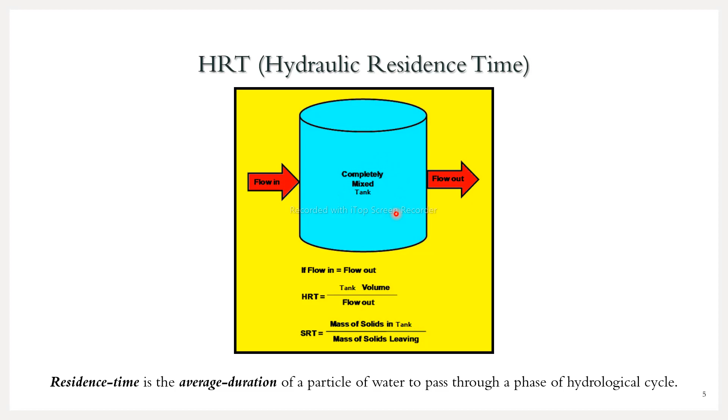So I am just briefing a bit on what was discussed at the last portion of my second weekly interactive session. First I discussed economic water scarcity. Then a brief concept about hydraulic residence time was discussed, which is nothing but the average duration of a particle of water to pass through a phase of the hydrological cycle.

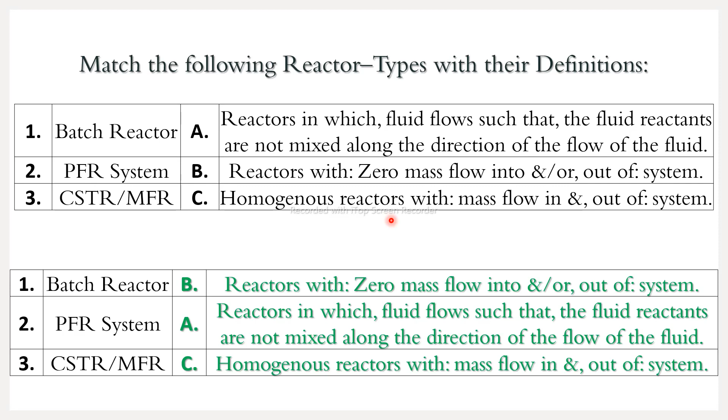One problem was solved for better understanding of the concept of HRT. Then we saw the definitions of batch reactor, plug flow reactor, and CSTR or mixed flow reactor. Then we saw the design equations or performance equations of various types of reactors: batch, continuous stirred tank or MFR, and plug flow reactor.

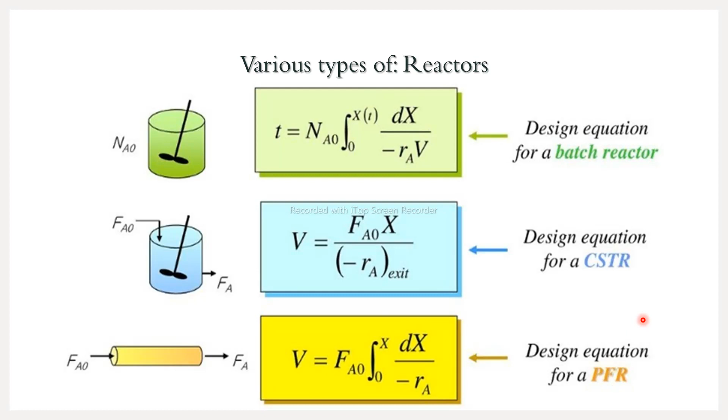Then we derived the equation for first order kinetics in the case of a batch flow system. So if you do the similar mass balance for other order systems, and in case of other continuous flow reactors like PFR, CSTR or MFR, then the T or time term will be replaced with the T0 or theta term, which is nothing but the space time expressed as reactor volume divided by volumetric flow rate.

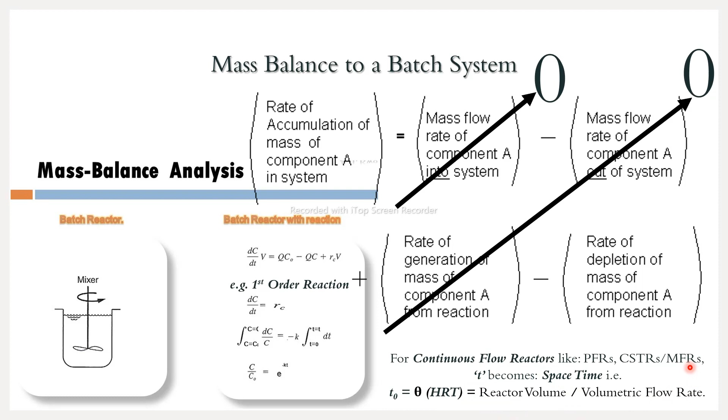And this type of equation we will obtain. Then we focused on the first order kinetics only, and based on the first order kinetics for all three types of reactor, batch, PFR and MFR, we solved one problem at our last class.

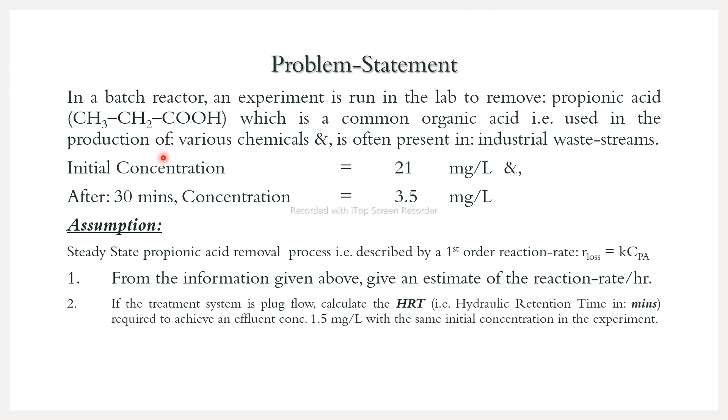So I hope the way the problem was solved is clear to everyone. If you have any questions regarding how the problem was solved, you can re-ask. We just did the mass balance and derived these equations, and these same equations were used to solve the problems to get the answers. You just have to put the known values into the equations in the problem, and then you will get the unknown parameter from the equation.

Okay, so I'm just quickly going through what was discussed at our last session. If anyone has any doubt regarding understanding of the same, then they can ask.

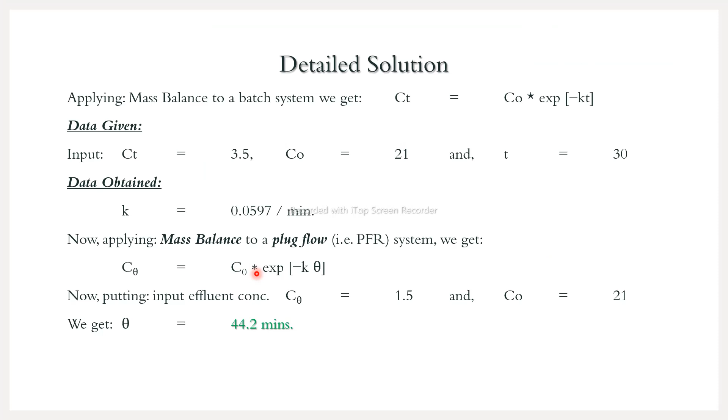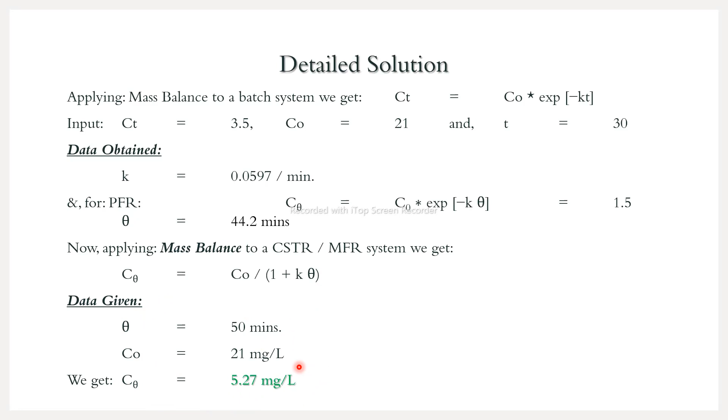So this was the last thing, the third problem, which was asked regarding MFR. You just had to utilize the mass balance equation applicable for the CSTR or MFR system, and based on the given data in the question, you got the answer. So this was the problem which was solved in our last session.

I will ask everyone present in the audience if you have any doubt regarding the solution and how to solve this kind of mass balance problems for different types of reactors for different order systems. If you still have any doubt, you can ask now. This is the correct time for you to ask. I can clarify the same for you, otherwise I'll be going through our today's new problems. Nobody has any question, I guess. I will wait for a minute.

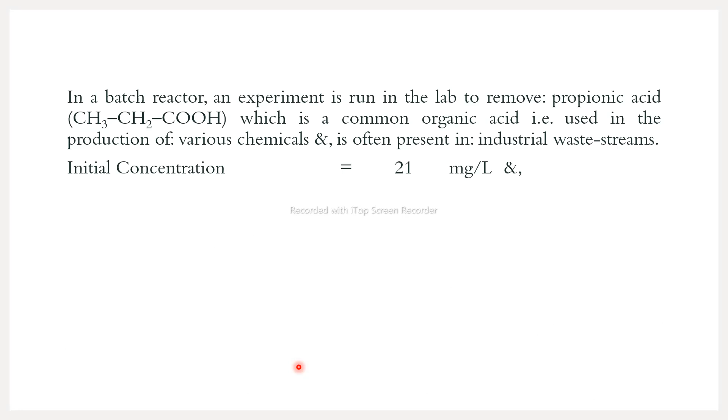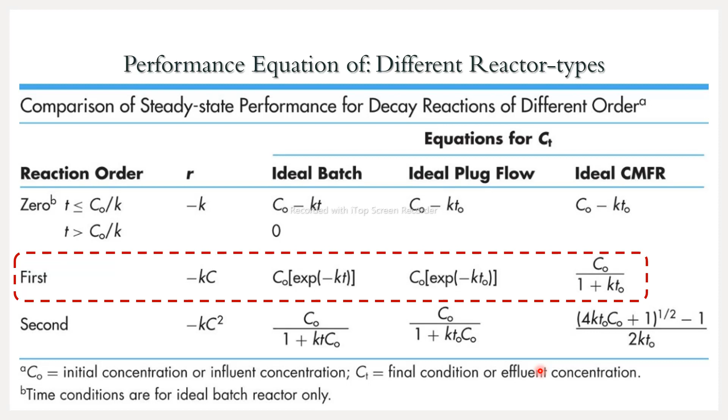This table comes to your aid. These formulas you have to remember. We solve problems based on first order kinetics only; higher order terms you don't have to remember. So zero, first and second order is enough, more than enough I would say. If you don't know integration, just memorize this table for solving the problem. Mainly you will be given problems from zero and first order only, second order is also rare. If you just memorize this table, this type of problem will be easy for you to solve.

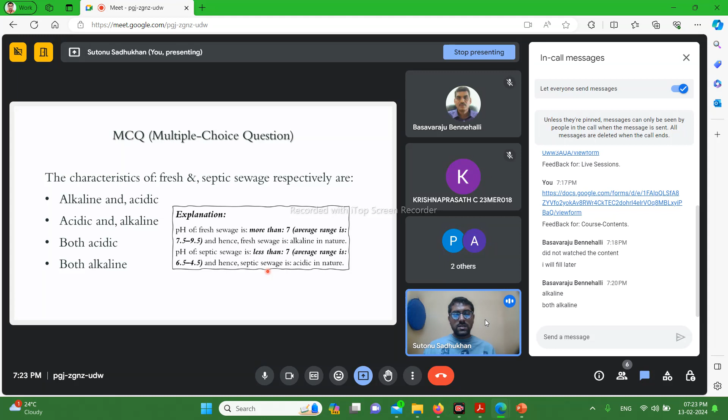Anyone else would like to answer? It is quite obvious, basically, because the microbes present inside the fresh sewage, as it gets treated, more acid is generated, and that's why the pH gets lower. It's just like if you have food particles in your teeth, then there are microbes. They will degrade that food particle, right? And acid will generate, and it will degrade the calcium carbonate present inside your teeth.

The same thing is for this also, because of the microbial activity mainly, and also some other aspects. Septic sewage is basically in a closed environment, but fresh sewage is not - it is transported. That's why septic sewage is generally acidic in nature, and fresh sewage is alkaline.

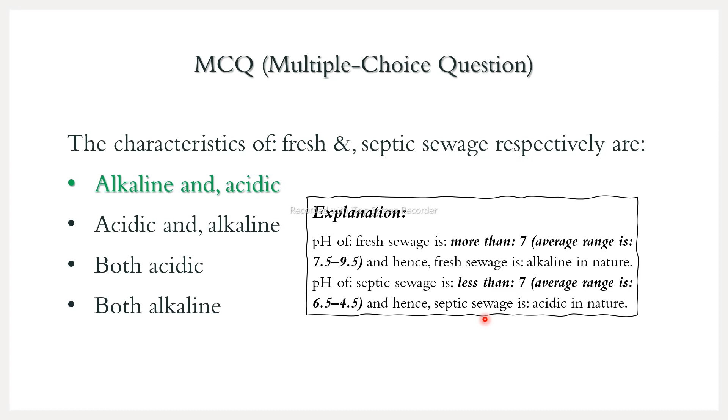Okay, so that's basically the pH range. You just have to remember the pH range, and then you will be able to answer. More than 7 is alkaline, and if it is less than 7, it is acidic. That's all. pH - everybody knows how it's calculated. It is the concentration of H plus ion present inside a liquid, then if you take the minus log of it, that will be your pH. So the small p means minus log.

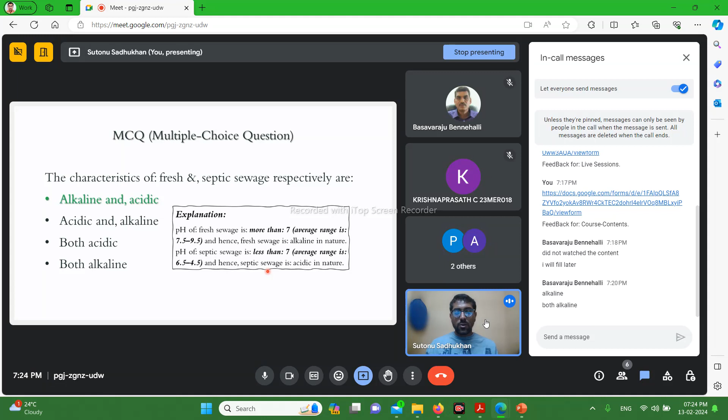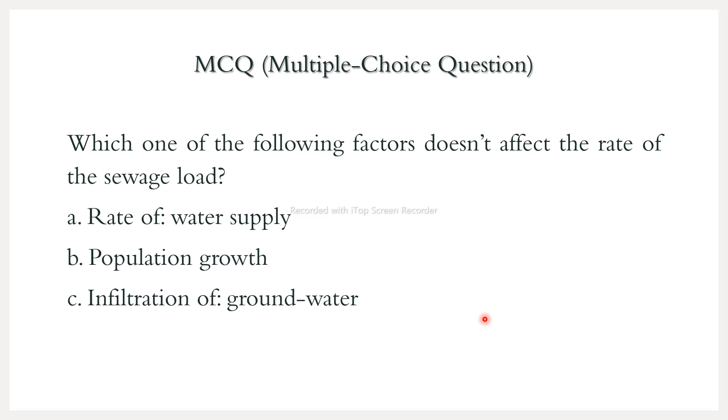That's all, so now going to the next question. Which one of the following factors doesn't affect the rate of the sewage load? This is also an MCQ. The options are: A, rate of the water supply; B, population growth; C, infiltration of groundwater; and D, design of sewer system. I will wait for 2 minutes for you to type the answer in the chat box - A, B, C, D, in this way you can write.

Okay, Prashant is telling us C, infiltration of groundwater - it doesn't affect the rate of sewage load, you are saying. So I would say, the rate of sewage load where - basically the tank, the sewage treatment plant where the sewage is loaded, it is on the ground. So do you really think that infiltration of groundwater won't affect the rate of sewage load?

Generally the sewage treatment facility and the tank where the sewage is stored is touching the ground, not generally designed above ground. So there are chances of infiltration of groundwater inside the sewage tank. Do you think if there are chances of infiltration of groundwater inside the sewage tank, will it affect the sewage load? What do you think about that?

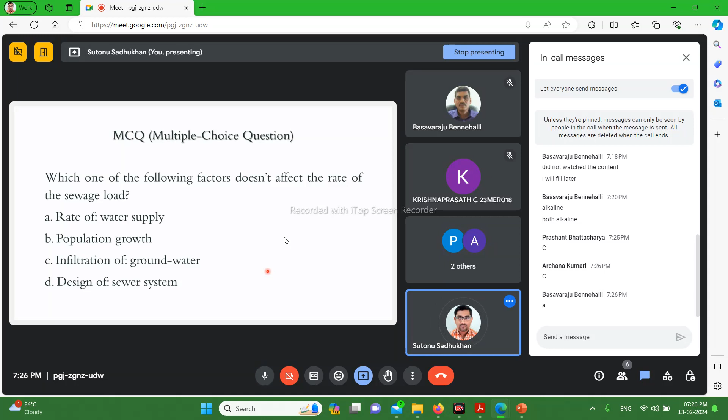Rate of water supply, Basavaraju is saying. So you see, the amount of water that needs to be treated, that's basically your sewage - the household wastewater that is coming to the water treatment plant. So the supply is actually given based on the demand of the households, right? If the demand increases, the supply also increases. So if the supply of water increases, then the sewage generated from the household - what do you think about that? Will it change or not?

Or if the supply decreases, will the wastewater coming out of the households change or not? Because our body is basically a steady state, right, and you can also assume the houses to be a steady state. So the water going in, being supplied into those houses, the same amount of water is basically coming out - though the water particles are not exactly the same, the amount of water going in is more or less the amount coming out of the system, except there are huge cooling towers for centralized air conditioning.

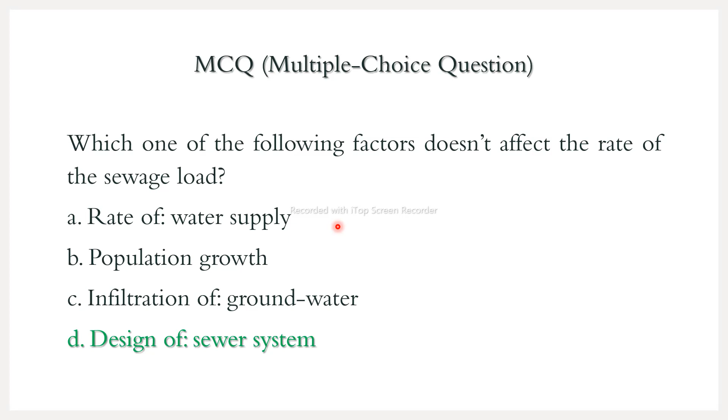Let's say you are having a settling tank, and you put wastewater with visible particles, the particles which are visible to our naked eye. You put that water inside the tank and hold it so that the particles which are visible settle out.

I discussed the size range of different particles in my last class. Can anybody say those ranges? You have all studied those ranges in your madhyamik, that is 10th level, secondary school level. So if it is between 10 to the power minus 5 and 10 to the power minus 7 meter,

generally those are colloid or suspended particles. If the particle is smaller than that, in the nano or angstrom ranges, those particles are dissolved in the water. If the particle size is more than 10 to the power minus 5 meter, that is in the micron level, then it will basically be suspended. If it is more than that, then the particles will not be completely miscible with the water.

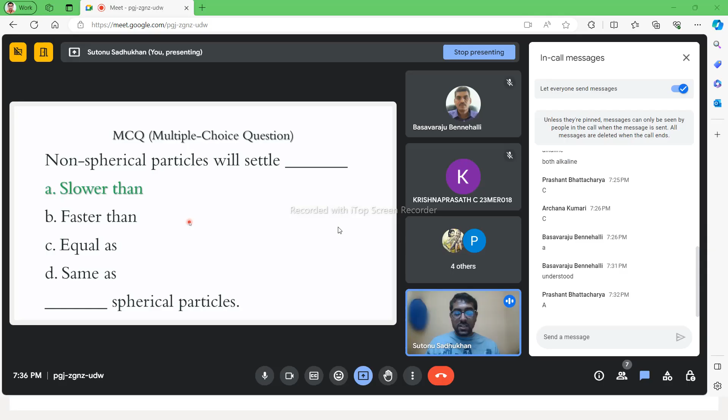As both of you stated correctly, Basavaraju and Prashant, the velocity will be slower for non-spherical particles. I think your answer is correct—non-spherical particles settle slower than spherical particles. I hope it's clear to others why this is so.

Now the next question: the peak factor is given by option A, peak flow into average flow; option B, peak flow minus average flow; option C, peak flow plus average flow; and option D, peak flow divided by average flow. You can type your answer in the chat box. I'll give you 2 minutes.

The question is telling us that generally factors are stated as ratios. Sometimes other mathematical operations like plus or minus are also used. Generally it is true, but whether in this case the factor is also the ratio between those two, that we will see. What about others?

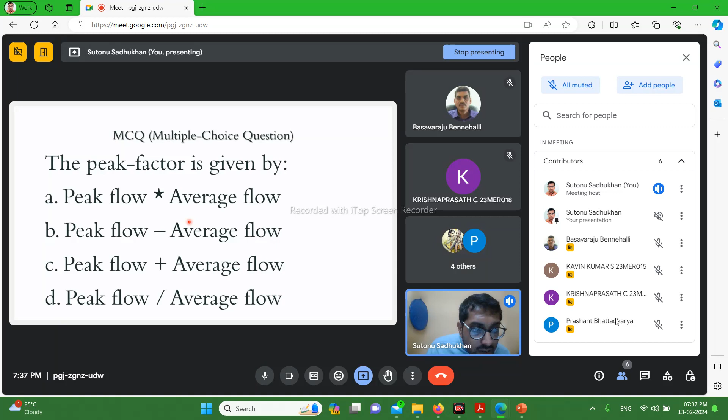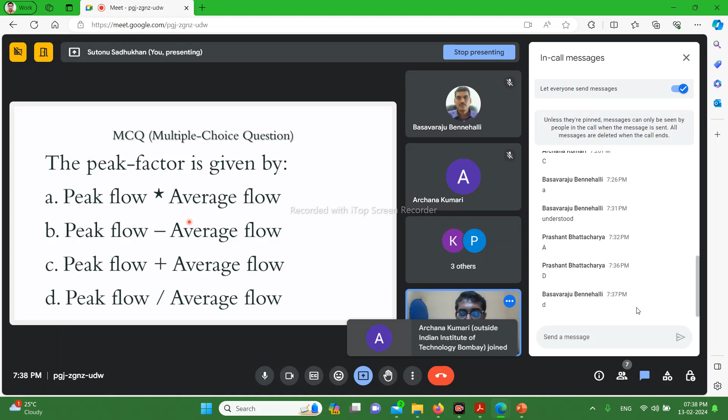Okay, so the answer to this question—all of you have stated it correctly. It is peak flow divided by average flow. This is how the peak factor is given. So I just told you, the factor is generally expressed as a ratio. We will see this concept later while solving some other problem.

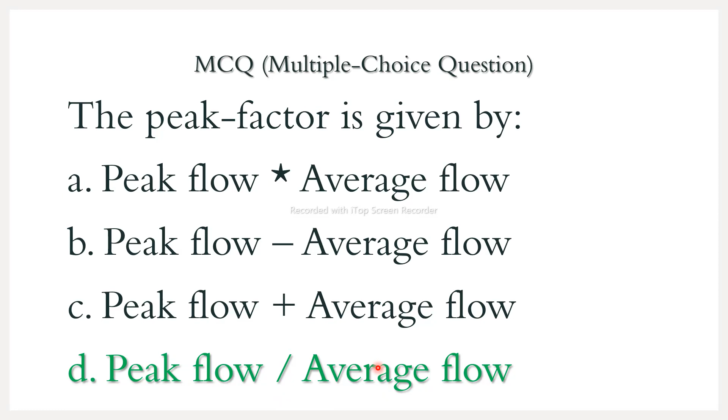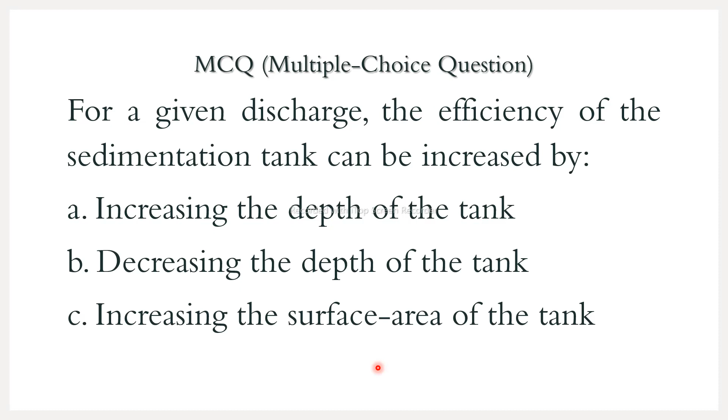Let's continue. For a given discharge, the efficiency of the sedimentation tank can be increased by: this is an MCQ, with options: A, increasing the depth of the tank; B, decreasing the depth of the tank; C, increasing the surface area of the tank; and D, decreasing the surface area of the tank.

So how can the efficiency of a sedimentation tank be increased? Please write your answer in the chat box.

A sedimentation tank basically works on the principle of terminal settling velocity that I told you earlier. Sediments mean those particles in the water which are not colloidal and not dissolved. If you keep the tank stagnant over a long time, they will just settle at the bottom of the tank, that's all. So you just have to apply that concept.

So I would... okay, let people answer. Basavaraju has told us A. Any other guesses? I'll tell you the answer. I also forgot it, what is it? Anyone else? Please come forward, type your answer in the chat box. Nobody is showing the courage.

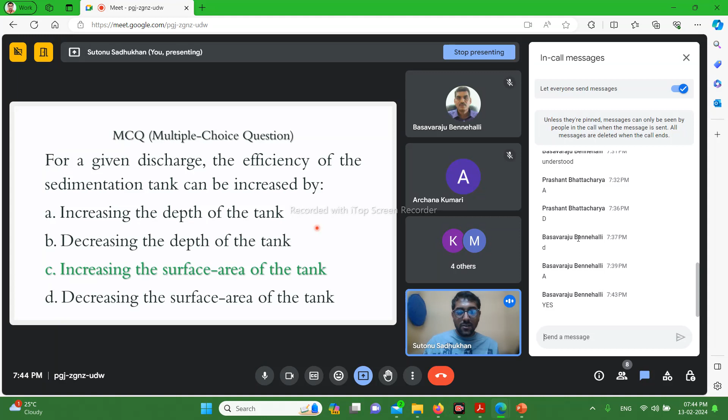It's a very common thing to get confused, so you will make mistakes. That's why we'll be able to discuss these things going forward, because others may be having the same doubt if they think of the same answer. If you go ahead and give the answer, only then will we be able to discuss why it is a common mistake. So I encourage everyone to give your answer and ask doubts and be interactive in this session, because this is the idea of the live sessions, right?

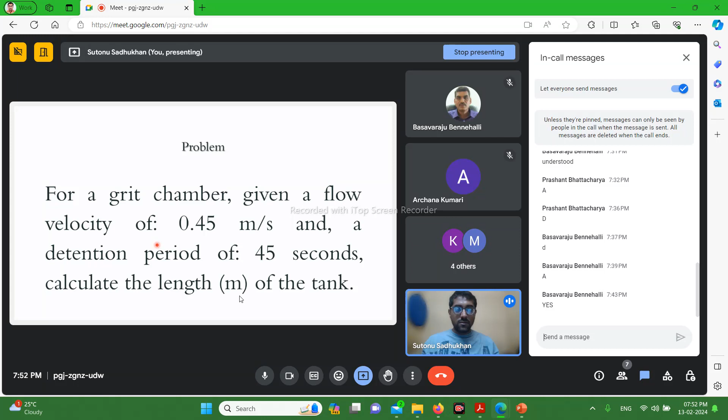Okay, so a very simple problem. You have been asked to find the length of the tank. Flow velocity is given as 0.45 meter per second, and detention time is 45 seconds. Length is nothing but flow velocity into detention time. Just check the dimensions: meter per second into second, the second cancels out and you get meter. So 0.45 meter per second into 45 second becomes 20.25 meter.

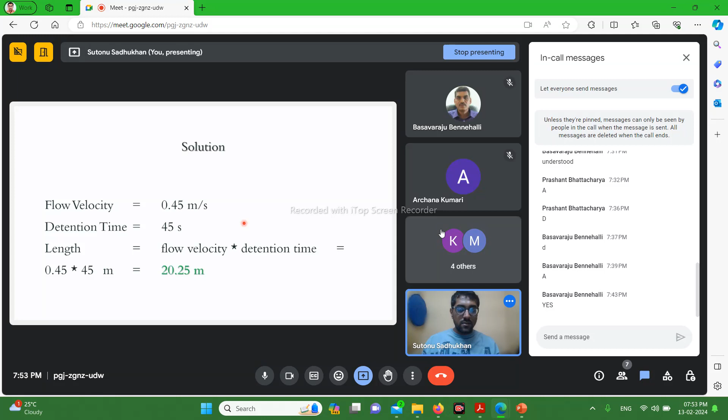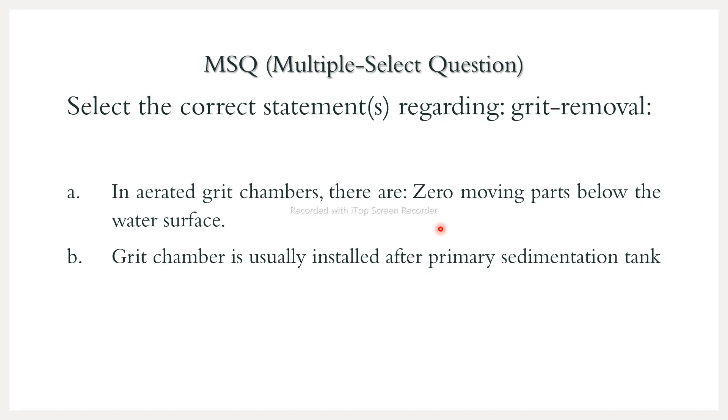Now you have to select the correct statements regarding grit removal. It is an MSQ, that is multiple select question, so the options may be one or more, there is no guarantee. Option A: in aerated grit chambers, there are zero moving parts below the water surface. Option B: grit chamber is usually installed after primary sedimentation tank. Option C: grit chambers are used to remove oil and grease from wastewater. Option D: the purpose of the proportional weir at the end of the channel type grit removal system is to measure the rate of flow inside the channel.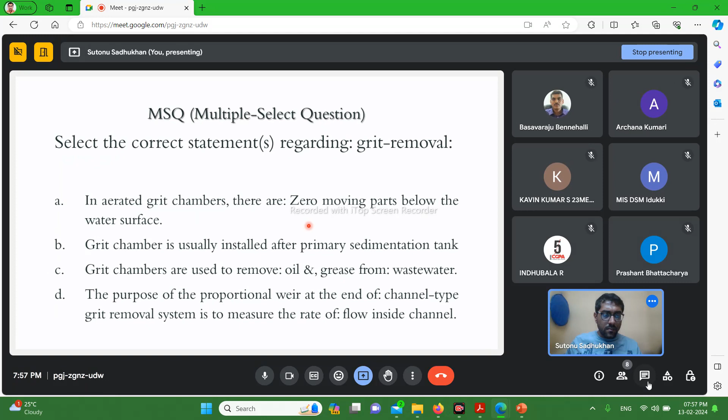Hmm? Okay, so we will see.

So option A and D are correct, right? Because grit chamber separates particles which are not miscible, not dissolved, not suspended. They are separating those kinds of particles. So they are installed at a very preliminary stage, not after the primary sedimentation tank. Grit means particles larger than the sediments, both not completely miscible in the water. That's why, with the help of gravity, terminal settling velocity or other concepts, they are settling. So both are not miscible, but the particle size of grit is more than the sedimentation particles. So as you go from the upstream side to the downstream side in any wastewater treatment plant, the particle sizes being separated in the different unit operations decrease. The larger particles are separated upstream, that is preliminary, primary, grit chamber, sedimentation tanks, and the smaller particles, in the dissolved zone, are separated at later stages, just like bivalent salts separated in nanofiltration, monovalent salts separated in RO. So the finer the particle, the more you go from upstream to downstream of any wastewater treatment plant. So option B is obviously incorrect.

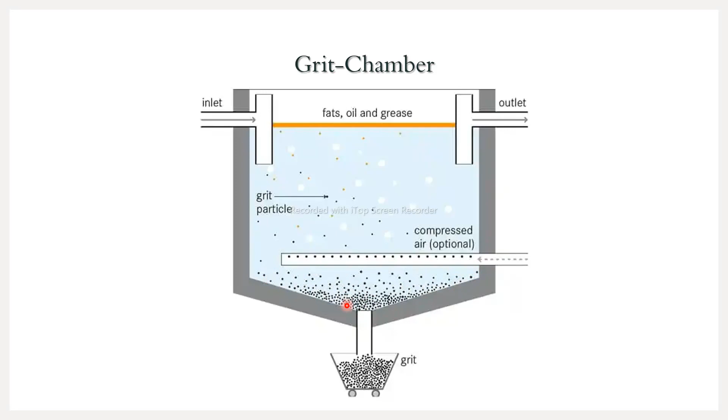I think nobody has given option A as the correct answer because you may have thought that the grit gate, which is opened after a few intervals for collection of the grit present at the bottom of the tank, is moving. That's why you may have considered option A to be incorrect.

So there is a discrepancy, you may say. In reality, there are zero moving parts, meaning zero continuously moving parts below the water surface. So the gate is obviously moving, but it is not moving continuously.

It moves at a very infrequent interval, when the chamber is being filled at the bottom. Then the water supply is cut off and the grits are taken out. Otherwise the water is taken continuously, so it's a kind of batch process.

It's just like cleaning your water filter. It is not in continuous operation, but would you say there is a moving part in your aquaguard? No. When the service persons come to your house and clean the water filter, they open it and it actually moves, but that doesn't count.

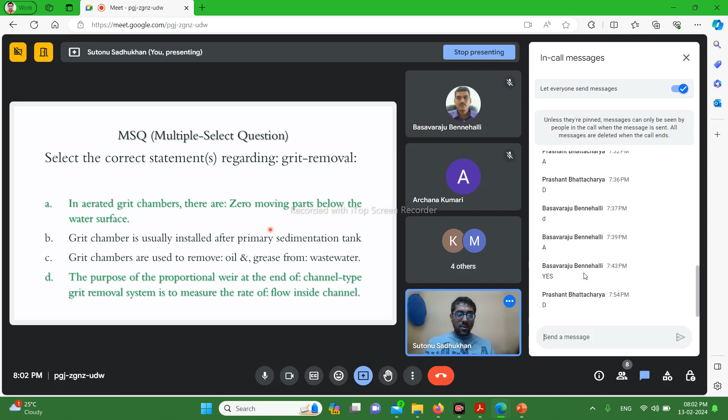So zero moving parts essentially means zero continuously moving parts. That's why, along with option D, option A is also correct. I hope that is clear. Nobody has any objection, I guess. Then we will move on.

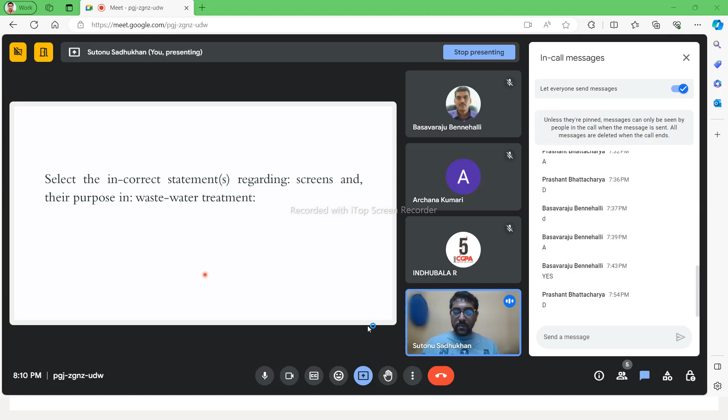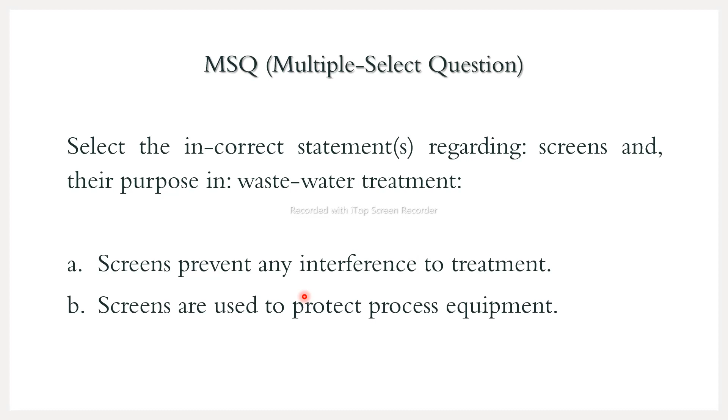In the next problem, you have to select the incorrect statements regarding screens and their purpose in wastewater treatment. This is again an MSQ, multiple select question. The options are: A, screens prevent any interference to treatment. B, screens are used to protect process equipment. C, screens are a part of secondary treatment. D, there is no head loss when sewage flows through them.

Basavaraju, Archana, and Indhubala—any one of you? Which one, or two, or three, or all of the following are incorrect statements?

Basavaraju is saying option C, that screens are a part of secondary treatment, is incorrect. Obviously bar screens and fine screens are not part of secondary treatment; they are part of preliminary treatment, even before primary treatment, installed to separate larger particles. Screens are meant to separate only those particles which are visible to the naked eye.

They can never be a part of the secondary treatment, right? This is a wrong statement. Archana is feeling option C to be wrong, and Basavaraju is also feeling option A is wrong - screens preventing any interference to treatment.

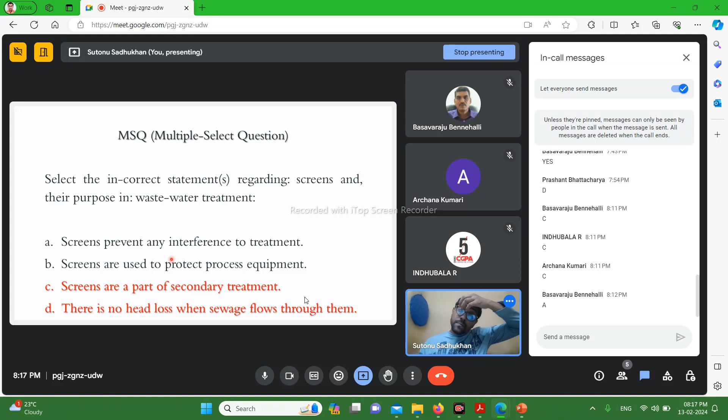Now it is clear, we will go to the next MSQ. You have to select the biodegradable organic matters from the following. Option A is carbohydrates, option B is methanol, option C is fats, and option D is polyethylene.

Nowadays there are certain biological innovations with which, even if in this problem certain compounds are not biodegradable, you will see research papers on those compounds. There are certain bacteria or methodologies being developed day after day which are able to degrade even those. So in that sense, all four could be biodegradable.

But what we are talking about here is standard industrial practice - in a standard continuous process for equipment, which compounds can be biodegraded and which cannot. That is only what you have to consider here, and you have to give your answer based on that. Archana is saying A and C. Basavaraju, it is your earlier answer.

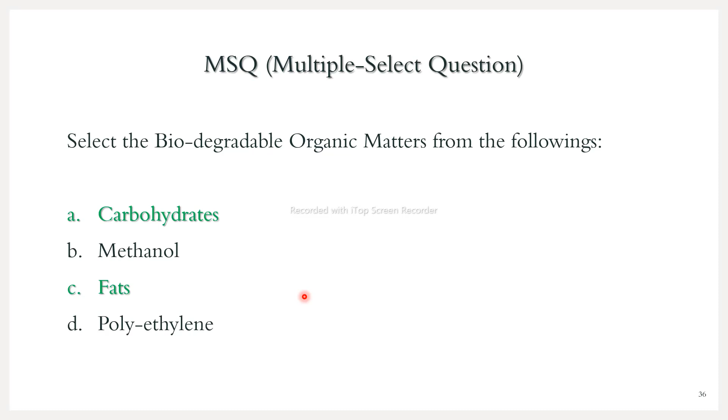A and C, carbohydrates and fats - I think it is correct, quite common. We don't have to worry much regarding carbohydrates and fats, they are biodegradable. Carbohydrates, proteins, fats, these three are basic biomolecules which are present inside our body.

Methanol is a very toxic compound, it cannot be present inside the water. Even ethanol is not generated in our body, it is generated by some industrial processes. So ethanol, though it is used for consumption, is not good for it, it causes liver cirrhosis also. So alcohol as a whole is not that biodegradable.

If the carbon chain is shorter, like methanol, ethanol, etc, but if the carbon chain is longer, it gradually becomes biodegradable in industrial process. But obviously, nowadays several innovations are there which can degrade even shorter length alcohols.

And polythene is basically plastic, polyethylene means polythene, same thing. So people are trying to biodegrade it. There are certain microorganisms which can degrade plastic. You'll see such reports in research journals and all, but those are not yet commercially available.

Otherwise, government would not ban the use of plastic, right? So plastic and methanol as a whole, they are not generally biodegradable, and carbohydrates, fats, proteins, these are all biodegradable compounds.

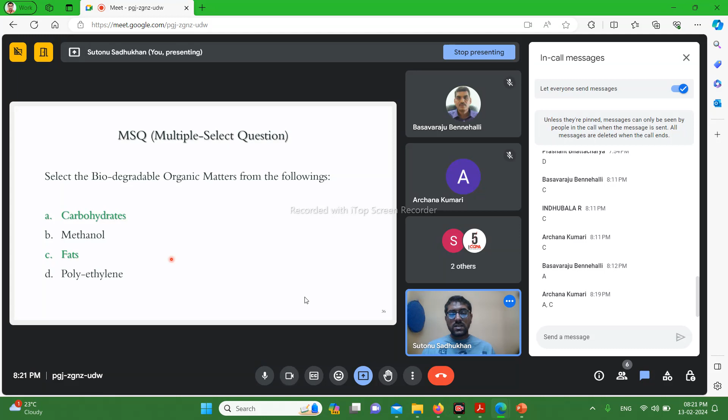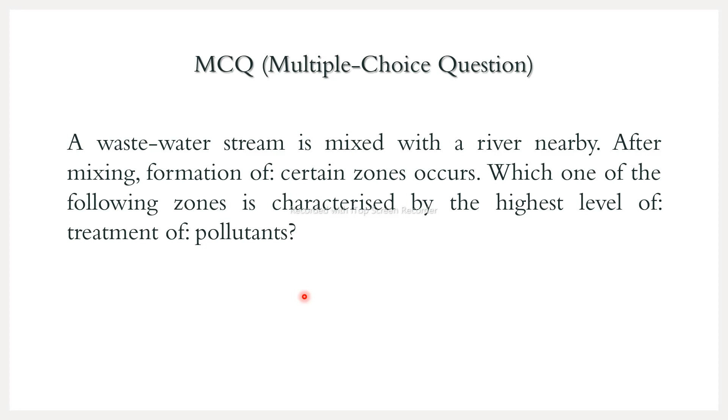Okay, so next question - is it a problem? No, it is an MCQ. A wastewater stream is mixed with a river nearby. After mixing, formation of certain zones occur. Which one of the following zones is characterized by the highest level of treatment of pollutants? Option A is zone of degradation, option B is zone of recovery, option C is zone of clear water, option D is zone of active decomposition.

If you see the river flowing and you are looking at it from the side, the wastewater stream is mixed at the river at a certain point, and along with the region where the wastewater is not mixed, the entire region distributed along the length of the flow of the river, parallel to the direction of flow, is divided into several certain zones. So which one of the following zones is characterized by the highest level of treatment of pollutants?

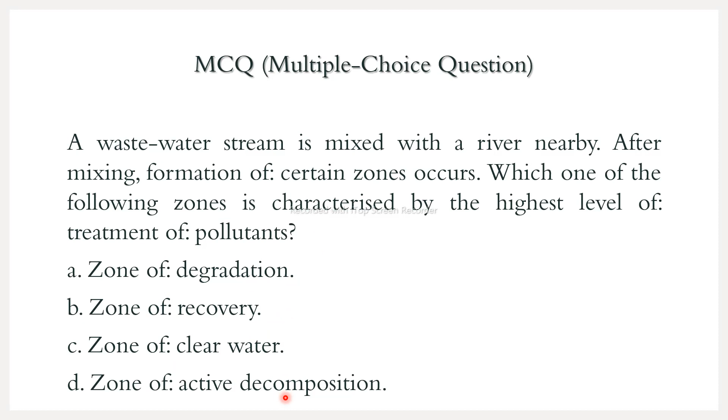This is not your artificial treatment. There are naturally microorganisms, microbes present inside the river, flowing through the river water, and they start treating the micropollutants or micronutrients present inside the wastewater stream. In which zone do they show their highest activity? The natural microbes present inside the river water - in which zone do they show their highest activity? That is the question, right?

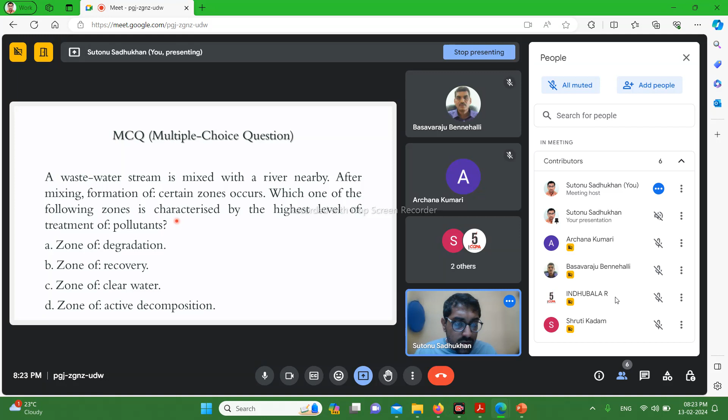So anyone? Any doubt regarding any previous question or this question? You can ask after giving the answer. How many of you have joined? Shruti Kadam, you can go ahead - so you joined after the break. Can you give the answer? Type in the chat box.

Okay, option D. Okay, I think you have given the correct answer. So okay, I just told you.

There are basically zone A, zone B, zone C, zone D, and zone - there are 5 zones. These zones are divided based on the DO, that is dissolved oxygen, present inside the water. The entire zone is considered as the zone of pollution. Now, the names of the 5 zones are respectively: clear water zone, the zone of degradation, the zone of active decomposition, the zone of recovery, and the zone of clear water.

This is your average DO, that is 40%, the average dissolved oxygen. So zone of clear water is the very initial or starting zone, and the last zone is also the zone of clear water - these two zones have the highest amount of DO. The zone of degradation and zone of recovery have falling and increasing rates of DO respectively, and in the zone of active decomposition, there is the lowest level of dissolved oxygen, and it is constant, not falling or increasing.

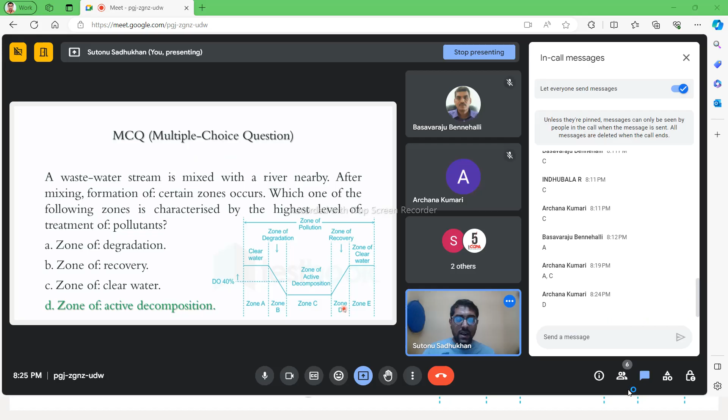Okay, so why is it so? Why this kind of graph you see? So basically, these are the 5 zones.

So zone of clear water, these are zone of clear water. This is the zone of active decomposition, the third zone, and the second and fourth zones are respectively the zone of degradation and the zone of recovery. Zone of recovery of what? Zone of recovery of dissolved oxygen. Zone of degradation of what? Zone of degradation of dissolved oxygen. So dissolved oxygen is degrading, dissolved oxygen is recovering in these two zones.

And if you see, though the entire zone is called the zone of pollution because a certain buffer is taken, the wastewater is not introduced at this point. The wastewater is introduced between zone 1 and zone 2. So immediately after the wastewater is introduced, the dissolved oxygen level falls down. It is minimum at the zone of active decomposition, then it is again increasing.

If you see the number of species present inside the water, number of species means there are various types of microbials, that is your A, B, C, D, E. Let's say there are 20 types of microbes present inside the water.

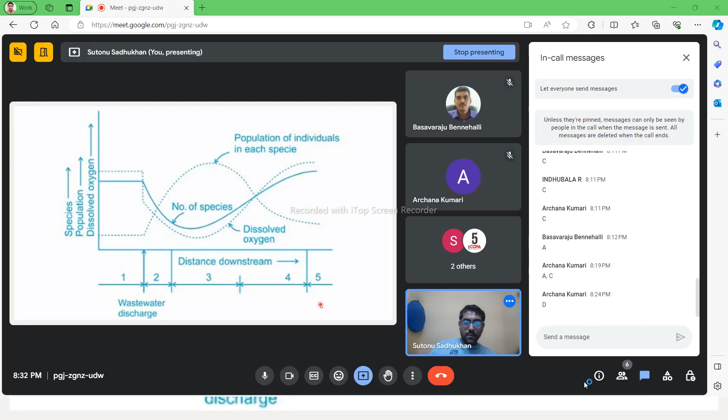The introduction of this concept through this MCQ was necessary for you to understand the concept of BOD and solve the further problems.

How is the measurement of biodegradable organic content done? Is it DO? DO is dissolved oxygen. BOD means biochemical or biological oxygen demand. COD means chemical oxygen demand. And TOC means total organic carbon.

So Basavaraju is telling us BOD. As we will solve problems on BOD, we'll take this answer, and it is correct: BOD. So what is your biological or biochemical oxygen demand? Some people say biological, some say biochemical oxygen demand. So what is it basically?

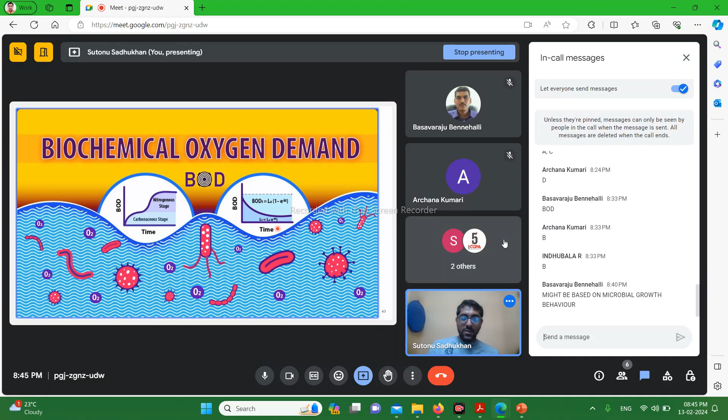Okay, so we'll go further for solving. How much time is left? 15 minutes left, so maybe we'll solve a couple of problems on BOD.

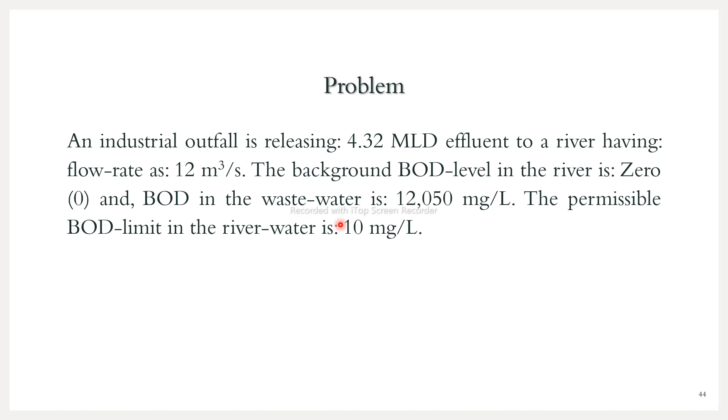First problem: an industrial outfall is releasing 4.32 megaliters per day, that is 10 to the power 6 liters per day, of effluent to a river having a flow rate of 12 meter cube per second. The background BOD level in the river is 0 - this base level needs to be mentioned. The BOD in the wastewater is 12,050 milligram per liter. The permissible BOD limit in the river water is 10 milligram per liter. You have to assume instantaneous mixing at the discharge point.

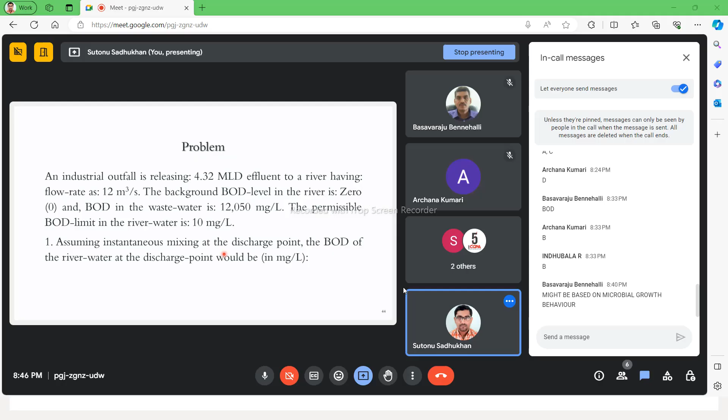Then you have to calculate the BOD of the river water at the discharge point in milligram per liter whenever it is mixing. So in this first problem, no rate kinetics, nothing you have to take. You just have to do a simple mass balance to get the net BOD of the water at the mixing point after the mixing takes place.

I think so, no. You see the problem, what is there? If you don't understand the problem, then ask me.

So the flow rate of the river is 12 meter cube per second. The flow rate of the effluent is 4.32 megaliters per day. You have to convert liter to meter cube. I know everybody knows, if you don't know, you can Google it.

Megaliter means, I have told, 10 to the power 6 liters. Mega means basically million, nothing else. Million liters per day, yes. So mega, million, all this means 10 to the power 6. Micro means 10 to the power minus 6. Giga means 10 to the power 9. Tera means 10 to the power 12, I don't know, maybe. So they basically increase with the order of 3 and decrease with the order of 3.

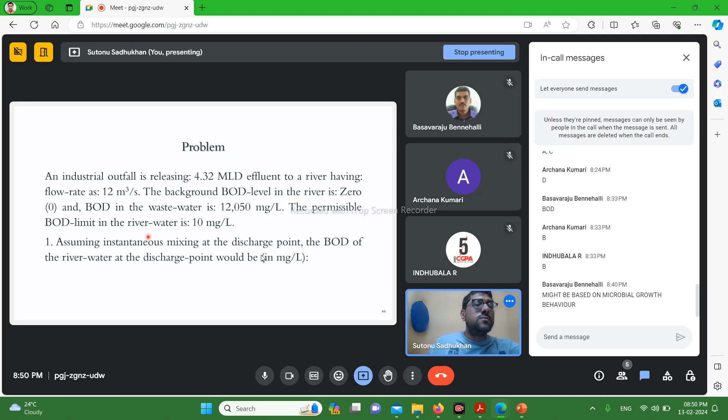We have to go fast, otherwise we will not be able to solve the other problem. Maybe we will have to wait for the next session, so I will go with the solution for the sake of time.

So the solution: data given is effluent flow rate is 4.32 MLD, which equals 4320 meter cube divided by 24 hours per day, into 3600 seconds per hour, so it becomes meter cube per second, 0.05. Effluent BOD is 12,050 milligram per liter. River flow rate is 12 meter cube per second. These are all the data given.

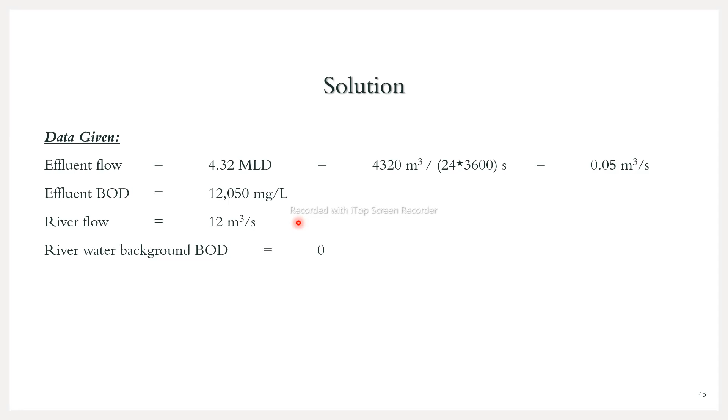Now it is also given that river water BOD is 0. Now you have to calculate the BOD at the discharge point, right?

Simple, as I told: river water is having 0, so 12 into 0. And the effluent that is coming in is 0.05 meter cube per second into the effluent BOD, that is 12,050 milligram per liter. This is your total BOD divided by the total flow rate.

If you consider it as a Y shape, one arm is the river water coming in, another arm of the Y is your effluent coming in, and the third arm is the total flow going out. So the total flow is 0.05 meter cube per second plus 12 meter cube per second. If you divide this with this, you will get

BOD as 50 milligram per liter. So here you can see there is meter cube per second and meter cube per second, this got cancelled out, and milligram per liter was the answer. Nobody calculated it, but I hope you have understood the concept.

So if your answer is within an acceptable range between 45 and 50, your answer will be correct.

So now the second problem: they are asking the percentage BOD removal required for the industrial wastewater to ensure the BOD of the river water sustains within the permissible limit, even at the discharge point, in percentage.

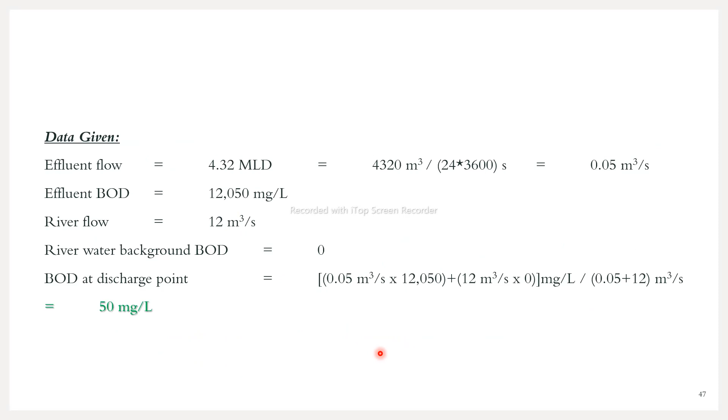So this is as far as we have solved. We have not yet utilized the 10 milligram per liter, which is the permissible limit, up till this point. So now that will be utilized.

Can anyone calculate it for me? I'll give you 2 minutes, maybe just 1 minute, because after this we will solve another problem.

Nobody? Half of the people left, I think. Only Archana, Indhubala, and Basavaraju are there.

Are you calculating in your copies? You don't have to take any notes. Just for the sake of problem solving, you can keep a scribble pad at your side, and a pen, just for the solving purpose.

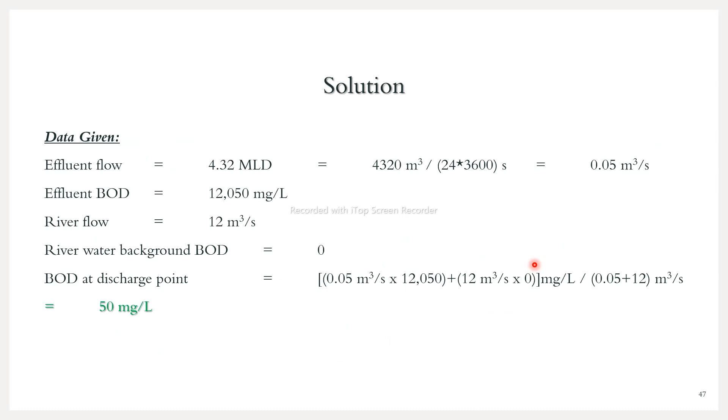Now the acceptable range for this is 75 to 85. If you have got your answer between these two, then it is correct.